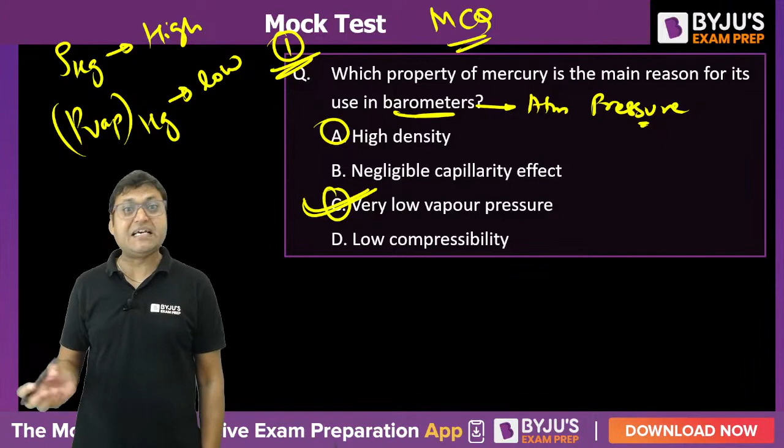The high density is also another reason, but that is the secondary reason. So whenever it is MCQ, you are supposed to select only one answer, one option. And if it is MSQ type of question, then both A and C will be correct. Do you agree? Do you understand it?

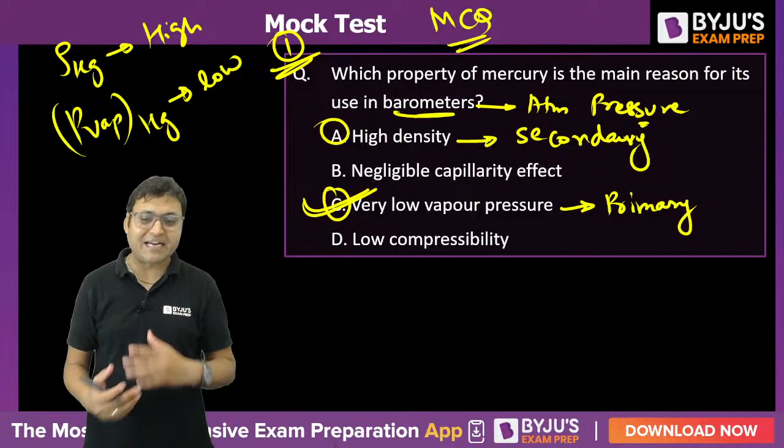Yes, Kiran, well done. Vinay, good, good, good, good. I want every one of you, it is my humble request, the more you share your knowledge, the more you take part in the discussion, the more improvement you will develop in your understanding of the concepts, right? So whether your answer is correct or incorrect, it does not matter at all. But your participation is highly important to start applying, to get the application of the concept in the questions.

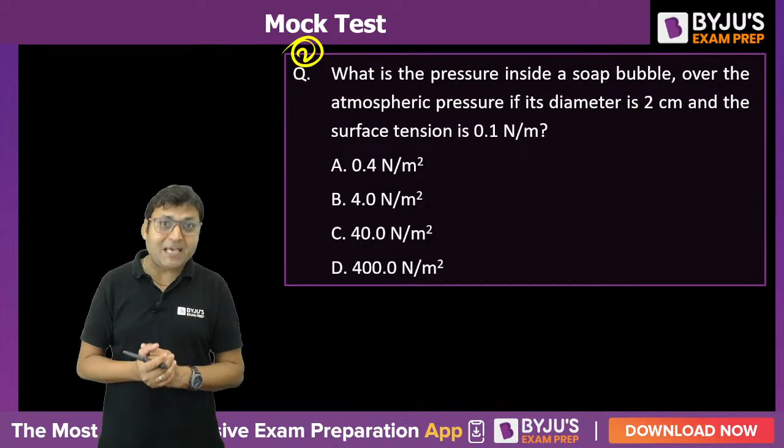All right, so question number 2 is on your screen. What is the pressure inside a soap bubble over the atmospheric pressure if the diameter of the soap bubble is 2 centimeter and the surface tension is 0.1 Newton per meter? This is the unit of surface tension, Newton per meter, or we can also call it Joule per meter square.

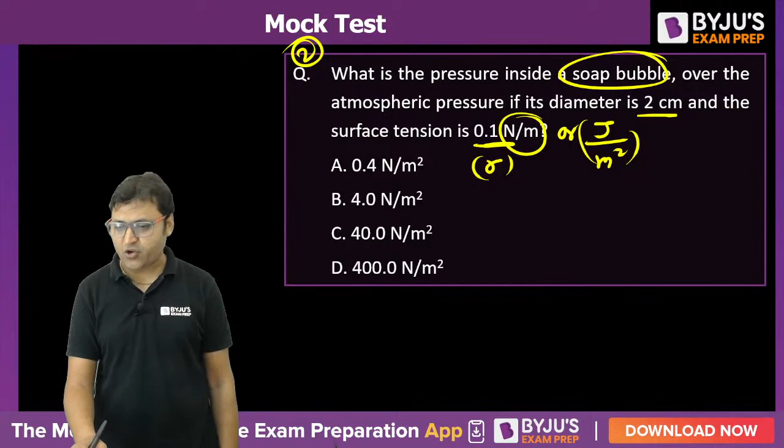Do you know that surface tension can also be defined as the surface energy per unit surface area of the liquid? Yes, because it is a soap bubble, so delta P for a soap bubble is having two interfaces. So 8 sigma by D will be the expression.

If it would have been an air bubble, do not get yourself confused. Air bubble or liquid drop are having only a single interface. Air bubble or liquid interface, delta P will be given by 4 sigma by diameter. So delta P is the pressure difference.

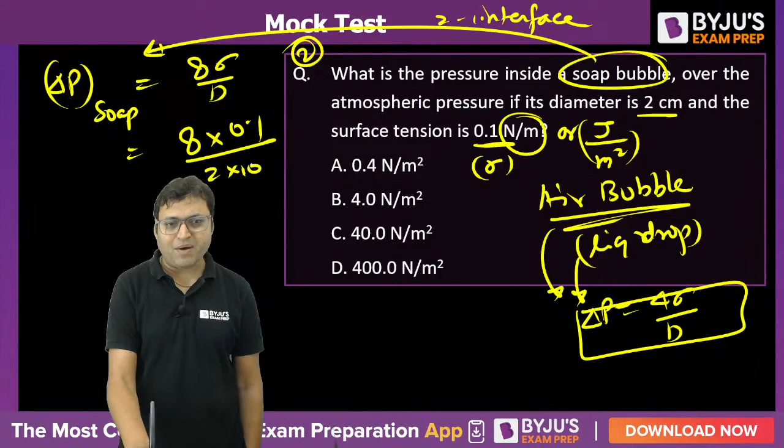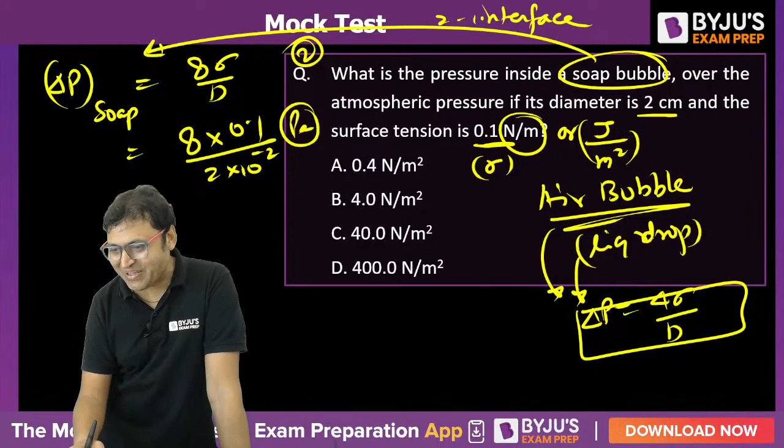If you put the values, 8 into 0.1 upon diameter, that is 2 into 10 to the power minus 2. If the answer is in Pascal, then what is the correct answer? Every one of you. Yes, Kiran, Naruto, well done. What about others? Vinay, good, good. 40 Newton per meter square will be the correct answer for this one.

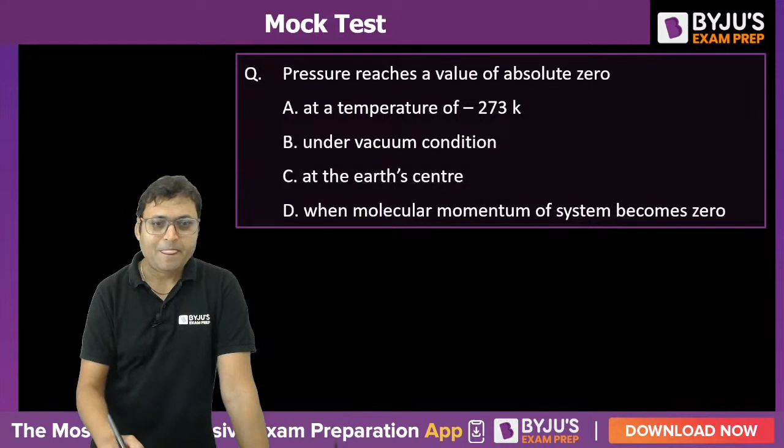Question number 3 on your screen. Quickly get me the answer for question number 3.

Pressure reaches a value of absolute 0. It means absolute pressure becomes 0 Pascal. When does this happen? At a temperature of minus 273 Kelvin? Minus 273 Kelvin never exists. At absolute 0, the absolute temperature is equal to 0 Kelvin. At the absolute 0, the pressure will be 0 Pascal and the absolute temperature will be 0 Kelvin.

Under vacuum condition, what is vacuum condition? Vacuum condition is when the pressure becomes less than atmospheric pressure. When the absolute pressure is less than atmospheric pressure, then it is called vacuum condition. At the earth center, that is not correct.

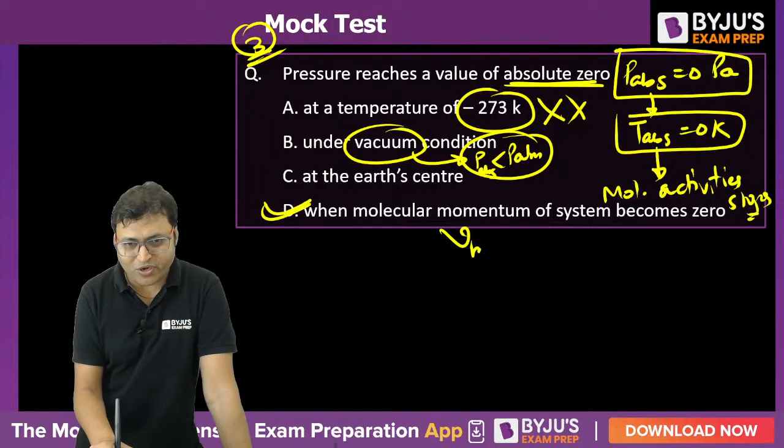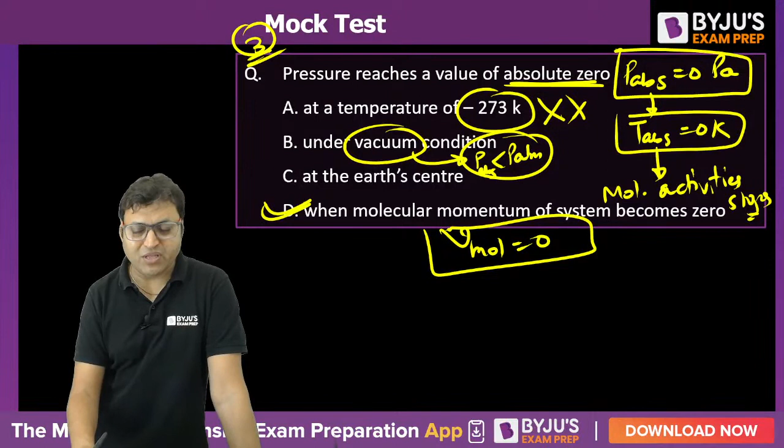At absolute 0, molecular activities stop. So that is why the answer to this question is option D. When molecular momentum of the system becomes 0, or the molecular velocity becomes 0, then only the pressure will be absolute 0, because pressure is the pressure exerted by the molecules. When the molecular momentum is 0, the pressure exerted will be 0.

Question number 4 on your screen. How is the metacentric height GM expressed in case of a floating body? Metacentric height is the parameter defined in case of a floating body or a partially submerged body. It is a memory based question, formula based question.

What is the answer? Yes, well done. So for stable equilibrium, center of buoyancy is lying below the center of gravity and the metacenter. So metacentric height is GM. This is called metacentric height. GM is equal to BM minus BG, isn't it?

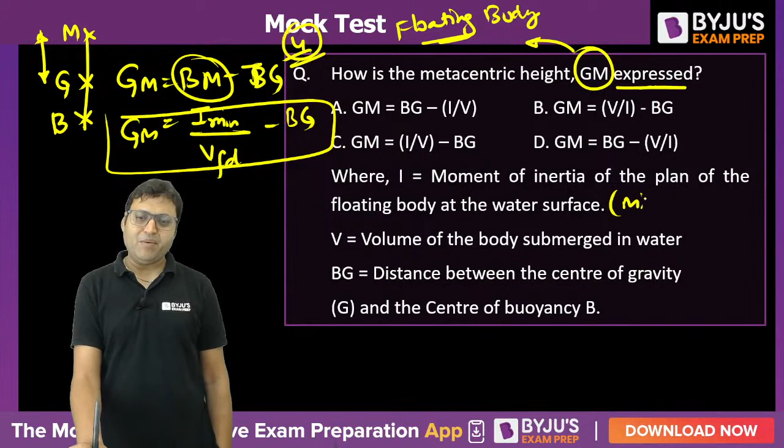And what is BM? BM can be calculated by I, the minimum moment of inertia, upon volume of the displaced fluid, minus BG. That is the expression for metacentric height. I is the minimum moment of inertia of the plane of the floating body, and V is the volume of the body submerged in water or volume of the fluid displaced. BG is the distance between the center of gravity and the center of buoyancy.

What is the correct answer? The correct answer for this question will be option C.

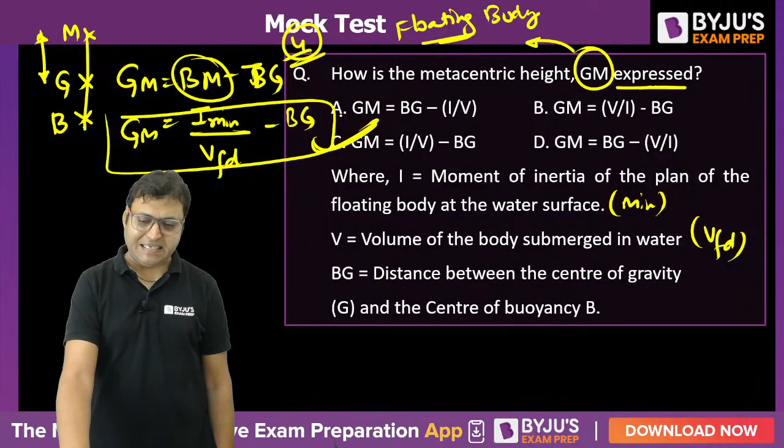Question number 5 on your screen. Try to solve question number 5. It is numerical, a simple numerical. Without using the calculator, you are supposed to get me the answer to this one. Can you do that? Yes, every one of you. Naruto.

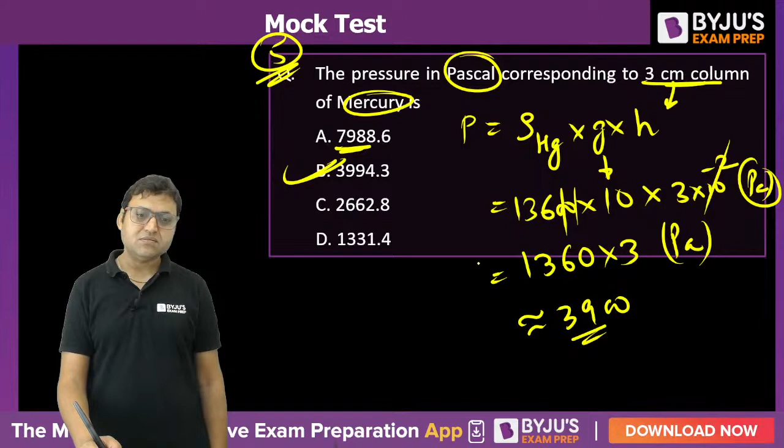Good, good, good. Let us move to the next one.

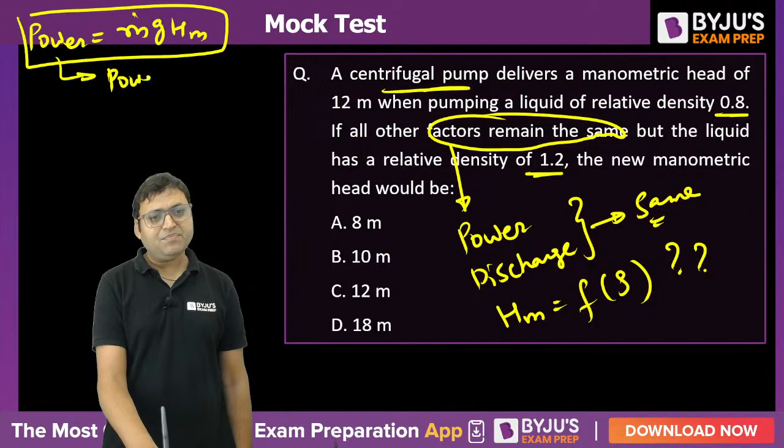We need to find out the manometric head as a function of density or specific gravity. The manometric head and specific gravity are interrelated, right? So can we say the power supplied by the pump is equal to m dot into G into HM, the head raised by the pump, the manometric head? M dot can be written as rho into Q into G into HM. That will be the expression of power.

So because discharge is constant, power is constant, can we say HM is inversely proportional to density? So we can say HM2 by HM1 is equal to rho2 by rho1, or it will be rho1 by rho2.

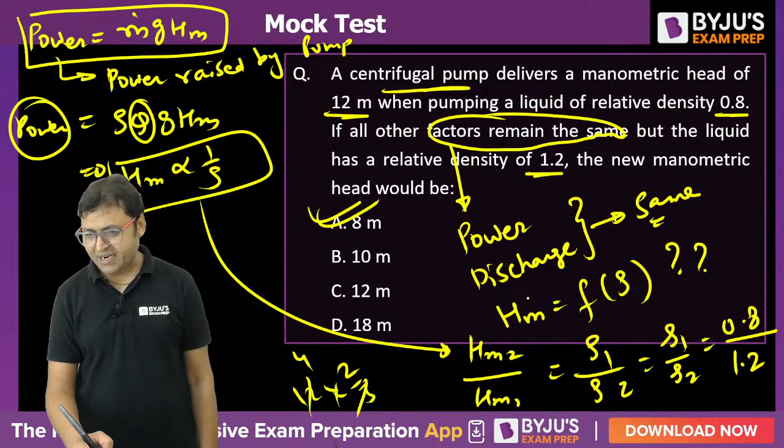What is rho1? We can write it in terms of specific gravity also. So S1 is 0.8, S2 is 1.2, and HM1 is 12 meter. So 12 into 8 by 12, so 12 into 2 by 3, isn't it? What is the answer? 24 by 3. A will be the correct answer, 8 meter. Yes, Kiran, Vinay, Naruto, well done. Correct answer is option A.

The next question on your screen. Try to solve the next one. There is an isosceles triangular plate. What is the meaning of isosceles triangle? Two sides are equal, with base 3 meter and altitude 3 meter. The base and height are 3 meter, immersed vertically in oil of specific gravity 0.8. The base of the plate coincides with the free surface of oil. We need to find out the depth of center of pressure.

The depth of center of pressure from the free surface of the liquid. There are two different parameters: one is the depth of centroid of the surface, another is the depth of center of pressure. What is the depth of center of pressure? The center of pressure is the point at which the hydrostatic force is supposed to be acting on the surface. What is the centroid? Centroid is the point where the gravity force is supposed to act. That is called the centroid of the plane surface.

So can you do the calculation? The base of the plate coincides with the free surface, so the diagram will be something like this. If you know the shortcut, if we want to find out the depth of centroid from the free surface, we call it x bar. So if the question had been about x bar, your answer would have been 1 by 3 into h, into 3.

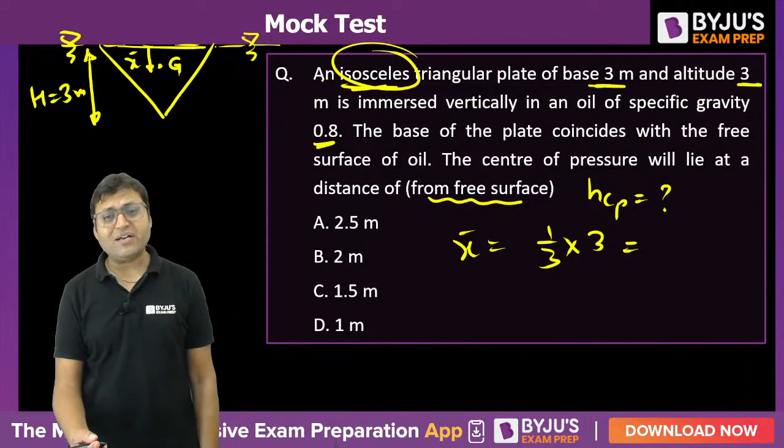Whether it is isosceles or not, it never matters. So 1 by 3 into 3, 1 meter is the depth of this.

What happened? One by 3, sorry. X bar by 2. What is the answer? How is it happening? What happened? X bar is equal to, what is the depth of CP?

X bar is 1/3 of h, sorry. So HCP will be equal to 1/3 of h. Put 1 and 1 in the numerator and denominator. So it is 2 by 3 h. Sorry, my mistake, this is the trick.

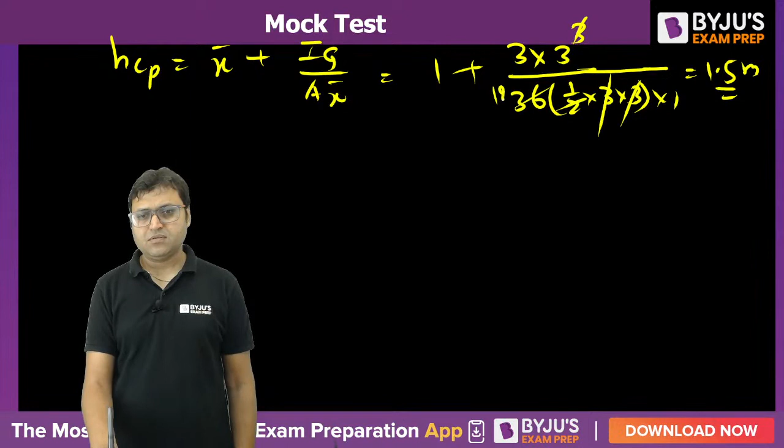3 getting cancelled out with this 3. So 1 plus 9 by 18, so that is 1 plus 1 by 2. 3 by 2, that is 1.5 meter. That is another way of getting the answer.

The next question on your screen. In a 1 in 50 model of a spillway, 1 in 50 means that is the geometrical scale ratio of a spillway. Discharge is 3 meter cube per second. Find the corresponding discharge in the prototype.

QM is given. We need to find out QP. What is the discharge in the prototype? Can you solve it? Can you get me the answer? If it is a spillway, do you know what is a spillway?

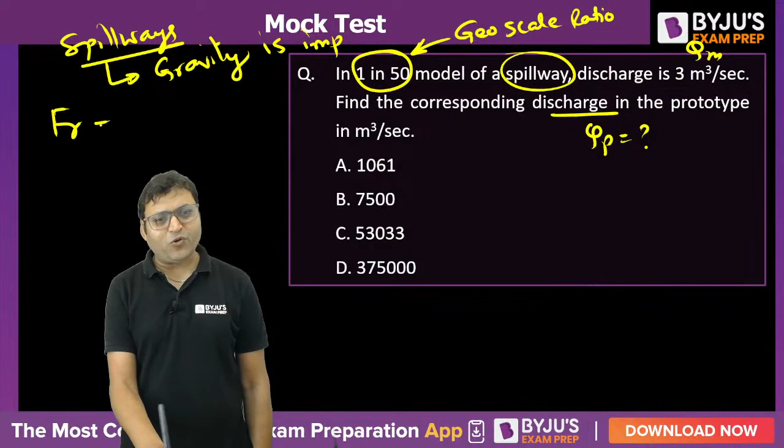The gravity becomes important. In case of a spillway, gravity will be important. So if the gravity is important, then the Froude model law will be applied. Froude number will be constant, that is equal to V upon under root of L into G. So from here we can say V is directly proportional to root L, and Q is proportional to D square into V. So Q is proportional to L square into root L, which is L to the power 2 plus 1 by 2, that is 5 by 2.

So QP by QM is equal to LP by LM to the power 5 by 2. So QP, do not use the calculator. Who is using the calculator? Anyone using the calculator? Prototype dimension will be 50 unit and the model dimension will be 1 unit. So it will be 3 into 50 by 1 to the power 5 by 2.

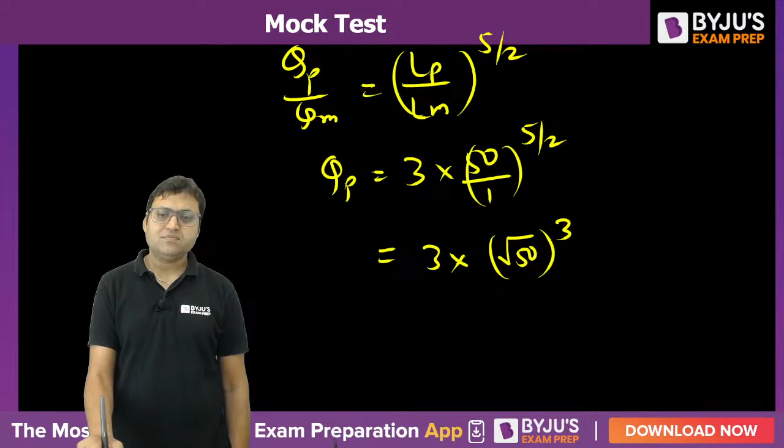Right? So can we write it as 3 into, what is root of 50? Can you find out the value of root of 50? That is close to 7. 7 7s are 49, so it is close to 3 into 7 to the power 5.

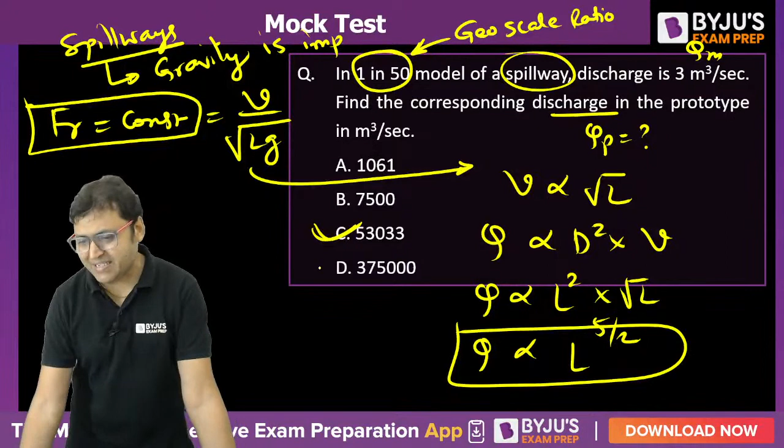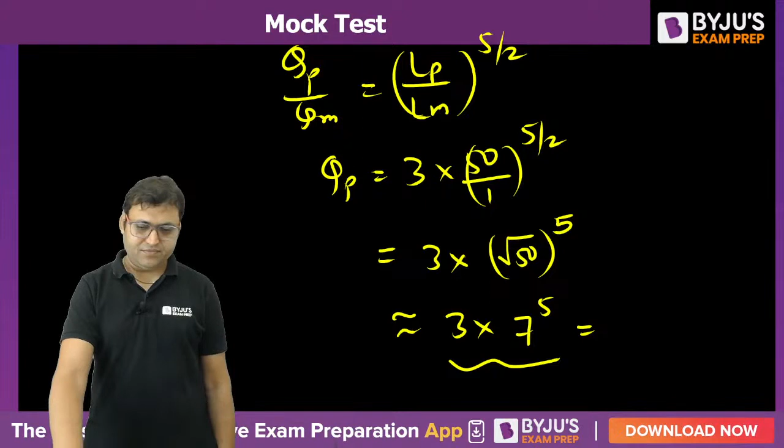If you do the calculation, your answer will be nearest to the option C. Your answer will be nearest to option C, isn't it? That is how you can do the calculation without using the calculator. It is close to 7 to the power 5 multiplied by 3, and 7 to the power 5 you can easily solve without using the calculator.

The next one. Which one of the following statements is correct?

Dynamic viscosity is the property of the fluid which is not in motion. Is the statement correct or not? Why do we call it dynamic viscosity? Because it gives us information about the dynamic parameter, which is shear stress or shear force required to make the fluid flow. That is defined as dynamic viscosity. We also call it absolute viscosity because mu is not a function of density.

What is the correct answer for this one? Cavitation results from the action of very high pressure, or cavitation results from the action of very low pressure? So C is incorrect. When the pressure of the liquid becomes less than the vapor pressure, then cavitation bubbles form. So C is not correct.

Real fluids have lower viscosity than ideal fluids. Ideal fluids have zero viscosity. Real fluids have non-zero viscosity. So ideal fluids have lower viscosity than real fluids. So D is also incorrect.

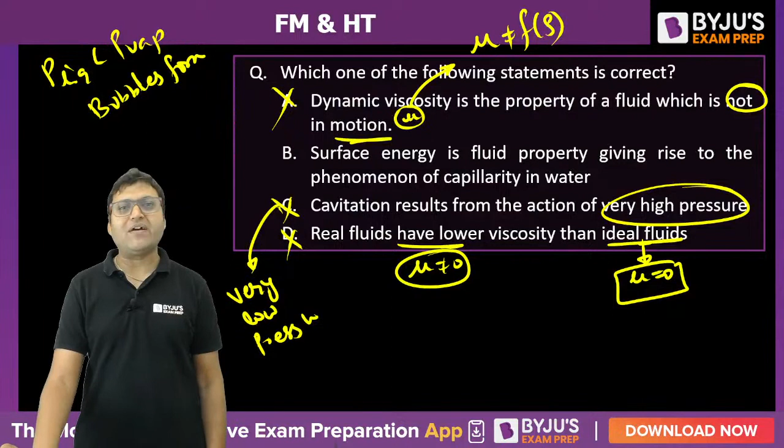What about A and B? Dynamic viscosity is the property of the fluid which is not in motion - that is incorrect, because dynamic viscosity is the property of the fluid whether it is in motion or not. It does not matter whether the fluid is in motion or not. Surface energy is the fluid property - surface energy is nothing but surface tension. Surface energy is the property of the fluid giving rise to the phenomena of capillarity in water. Yes, capillarity is because of surface tension. So B is the more appropriate answer.

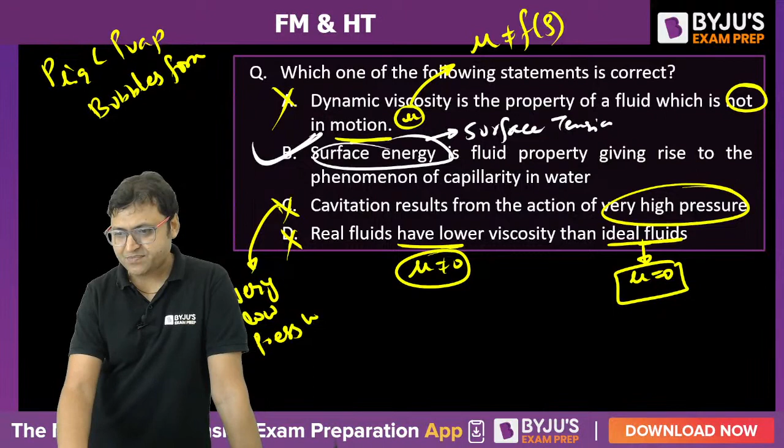The next one: Let C1 be the velocity of a pressure wave traveling along a rigid pipe containing water with its bulk modulus as given. Let C2 be the velocity traveling along a similar rigid pipe carrying oil of relative density 0.6 with its bulk modulus given. Through a similar pipe, what will be the ratio of C1 by C2? C is the velocity of the pressure wave, or velocity of sound in fluid. What is the formula for C?

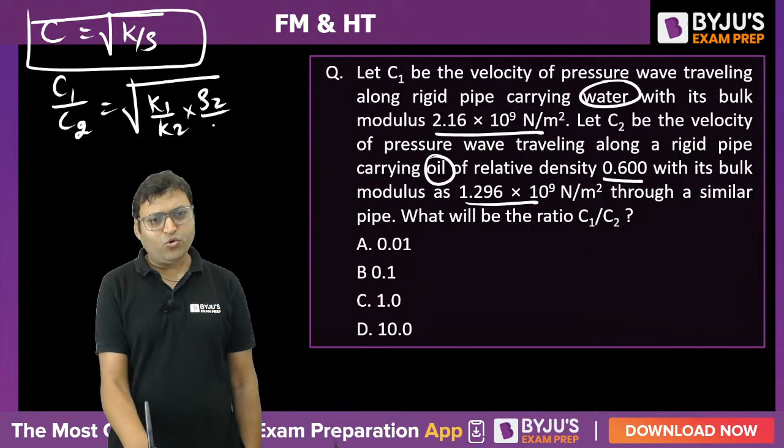C is calculated by under root of K by rho. So C1 by C2 is equal to under root of K1 by K2 into rho 2 by rho 1. Put the value and you will get the answer. K1 is 2.16 into 10 to the power 9, and K2 is 1.296 into 10 to the power 9, into rho 2, that is 0.6 upon 1.

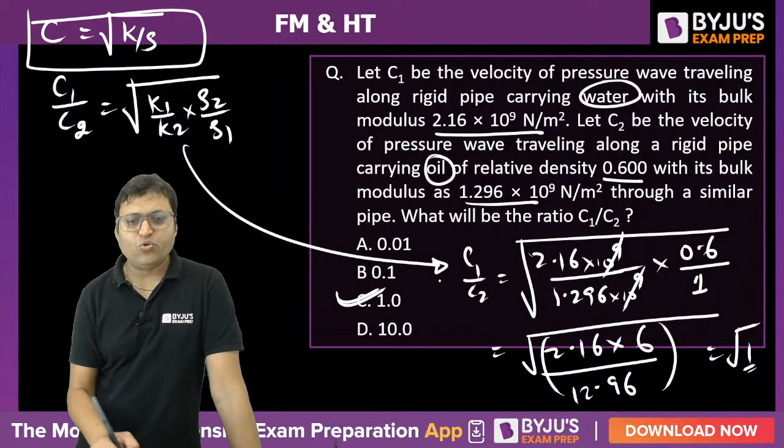So if you simplify this, 2.16, or we can say under root of 2.16 into 6 upon 12.96. So 2.16 into 6 is nothing but 12.96. So that will be root of 1. Root of 1 is 1.

Option C will be the correct answer. Option C. The next question on your screen.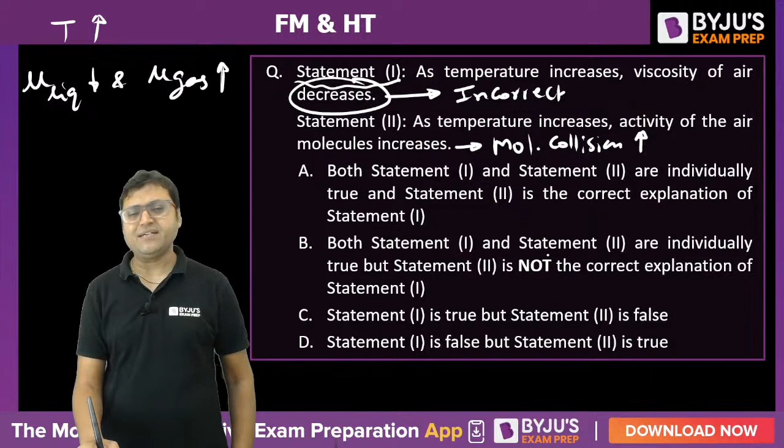Statement 1 itself is incorrect. As the temperature of air increases, activity of the air molecules increases - yes, increase in molecular collision. Molecular collision increases, or molecular momentum transfer increases, which increases the viscosity of the gas at higher temperature. So statement 2 is correct, but statement 1 is incorrect. So option D will be the correct answer.

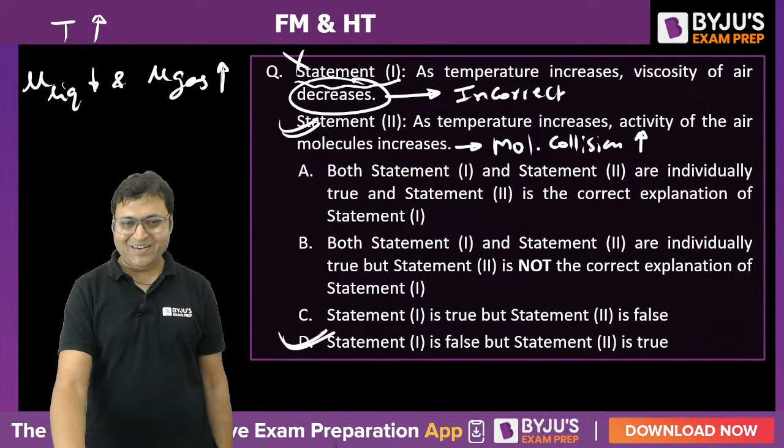The next question. Solve the next one. Find the answer to the next one.

A pressure gauge reads 57.4 kilopascal and 80 kilopascal respectively at a height of 8 meter and 5 meter fitted on the side of a tank filled with a liquid. We need to find out the density of the liquid. The pressure at the top is 80, wait, pressure is less at the top and more at the bottom. This is 57.4, this is 80, and the distance is 8 meter and 5 meter, so the difference is h. Can we write rho of the fluid into g into h is equal to 80 minus 57.4 kilopascal?

We can write the pressure equation. Let me call it A, let me call it B.

If we write the pressure equation, pressure at A plus rho fluid into G into H is equal to pressure at B. Pressure at B is 80 kilopascal, pressure at A is 57.4 kilopascal. So we can find the density of the fluid: 80 minus 57.4 equals 22.6 into 10 to the power 3 upon 9.81 into 3. 9.81 is almost 10, let us write it as 10 only. So the answer will be 2260 by 3, that will be the density.

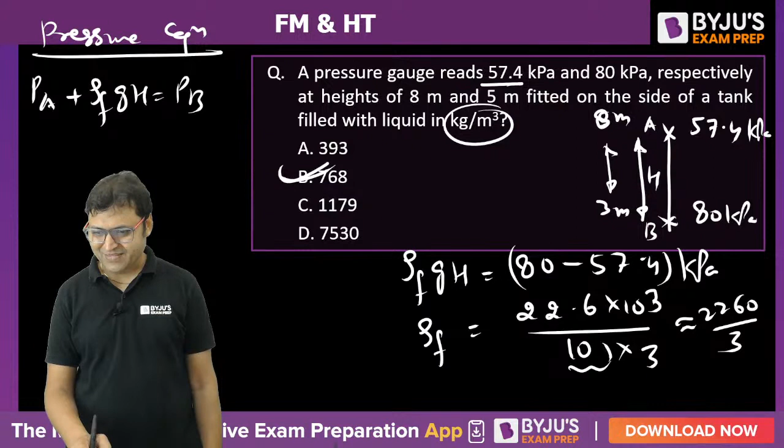It is close to 1120... sorry, 768. Yes, 2260 by 3, it is close to 768. Good, good, good, B is the answer.

The next one, find the answer to the next question. Question number 13. There are 25 questions in total, we are halfway. A mercury water manometer has a gauge difference of 0.8 meter.

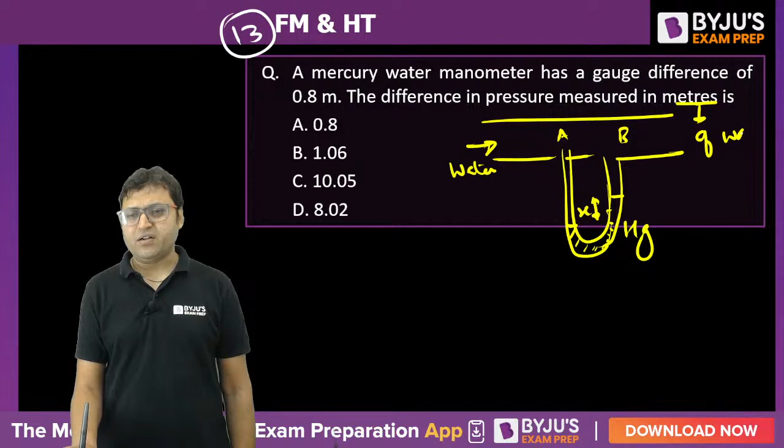This is mercury, and there is water flowing. There is water, and the manometric fluid deflection is X. So we need to find out the pressure difference in meter of water. If we want to find the pressure difference in meter of water, delta P by rho G equals manometric fluid deflection SM by SF minus 1.

So it will be 0.8 meter is the difference, 13.6 by 1 minus 1, so 12.6 into 0.8 meter of water will be the answer. 12.6 into 0.8, so it will almost be 10.05. C will be the answer.

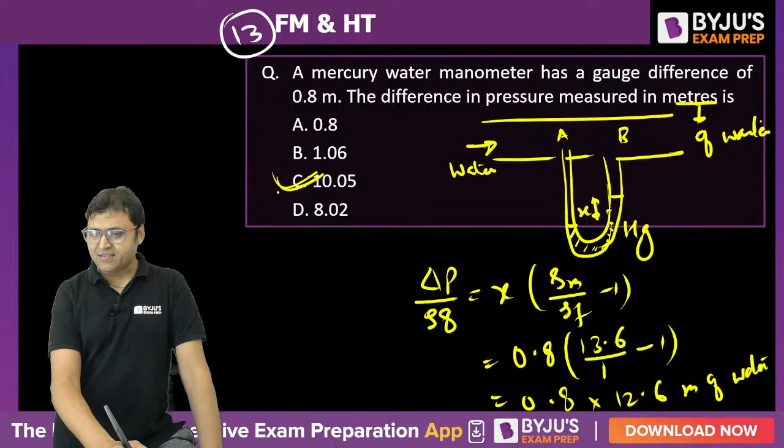Yes, yes, Kiran, Naruto, well done. 10.05 will be the correct answer.

The next one, can you see the figure? Are you able to see the figure? Consider the figure below relating to buoyancy in water. There is a body completely submerged, ABCDEF. What will be the downward force upon the top of the body? Let me know the answer.

The downward force exerted on the body is equal to the weight of the fluid which can be contained by the vertical hydrostatic force, which is the weight of the fluid that can be contained by the curve up to the free surface. Extend A and C up to the free surface. This volume will decide the downward force, FV1, and the upward force will be decided by this other volume. The upward force is calculated by that volume, and the net upward force is the subtraction.

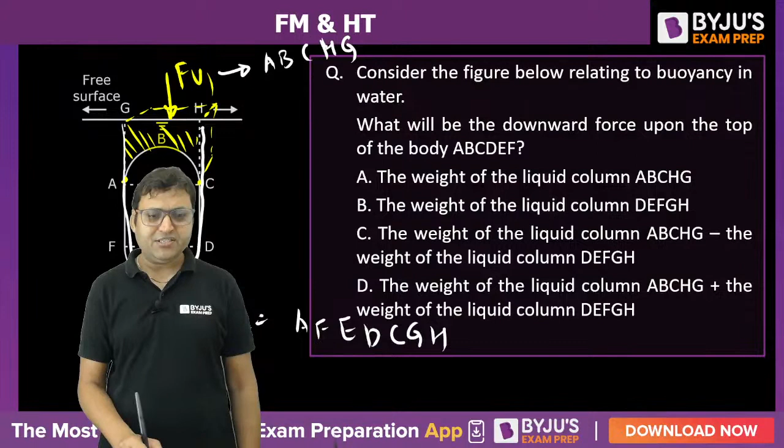So downward force will be equal to the weight of ABCGH or HG. And FV2, if we find FV2, it will be the weight of AFEDCGH, that is FV2. The difference of these two will be the buoyant force. So what will be the downward force upon the body? Option A will be the right answer.

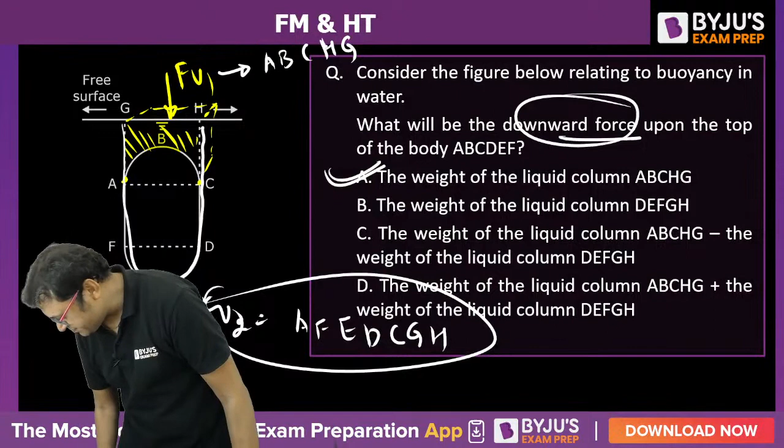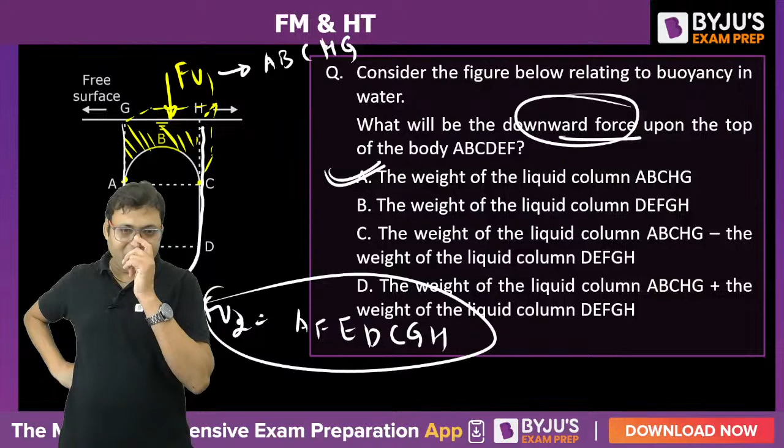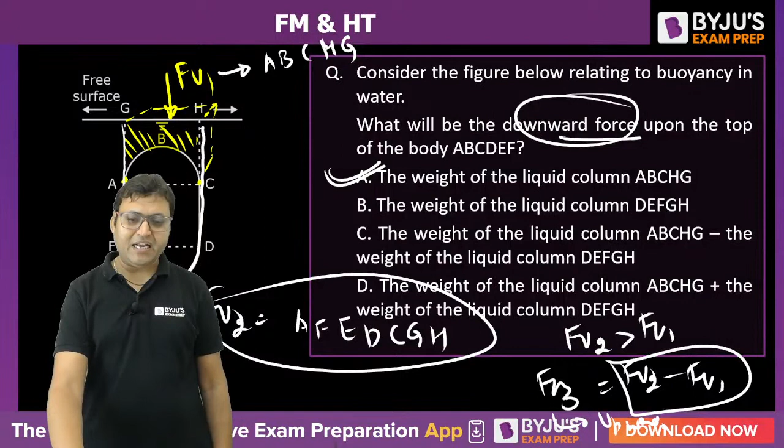The question is to find the downward force. If we want to find the downward force on a surface, extend the edges normally up to the free surface, so it's the weight of the fluid which can be contained by the curve up to the free surface. FV1 will be the weight of ABCHG, FV2 will be the weight of AFEDCGH, and the difference of these two will be the buoyant force. So option A is correct, but it is not the net force. The net force acts in the upward direction, not downward. FV2 will be greater than FV1, so the buoyant force equals FV2 minus FV1, which is upward. The net vertical force acts in the upward direction.

The next question on your screen. A ship has a metacentric height of 0.9 meter. That is GM. Its period of rolling is 20 seconds, that is the time period of oscillation. The relevant radius of gyration will nearly be?

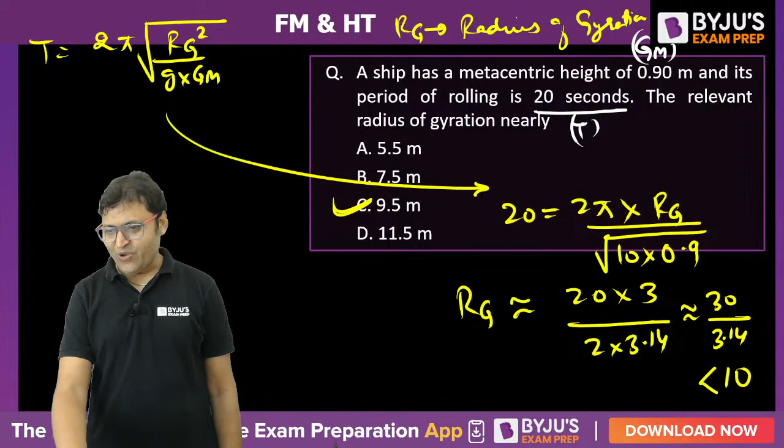Kiran, are you using the calculator? How are you getting such accurate values? Do not use the calculator. ISRO will not allow you to use a calculator, so try to do the calculation correctly without using one.

The next question: there is a two-dimensional water jet which strikes a fixed two-dimensional plate at 30 degrees to the normal to the plate.

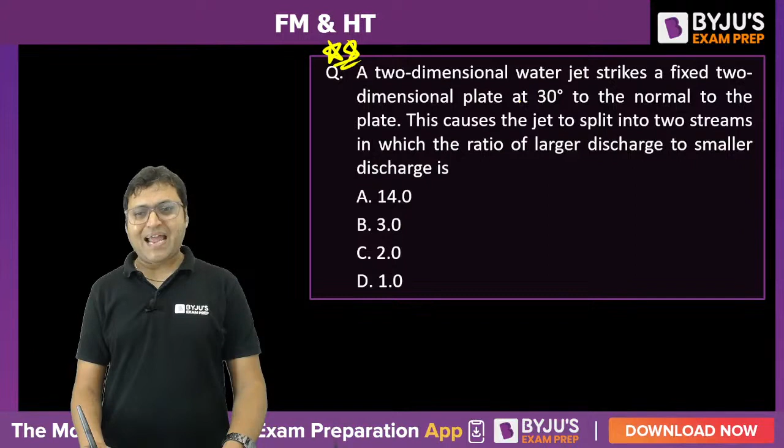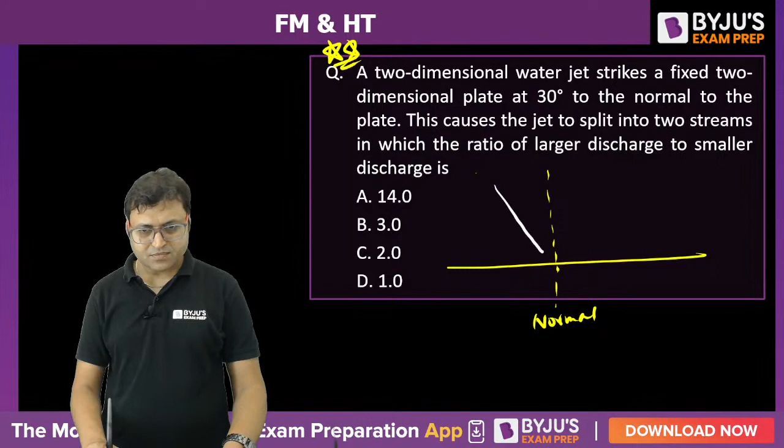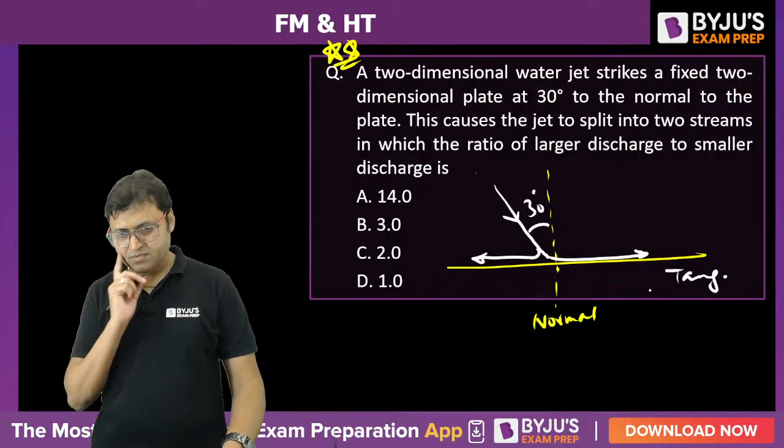A two-dimensional water jet strikes a fixed two-dimensional plate at 30 degrees to the normal to the plate. This is beautiful question. What is the answer to this one? This is normal to the plate, and this is how the water is striking, isn't it? This is 30 degrees. Some fluid will go this way, some fluid will go that way. This is the tangential direction.

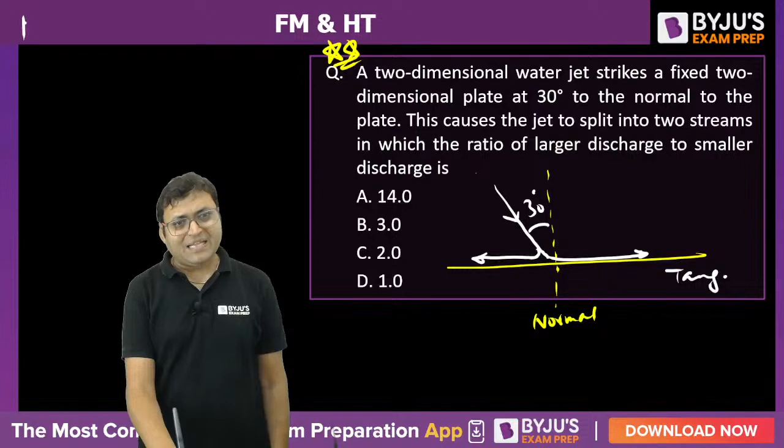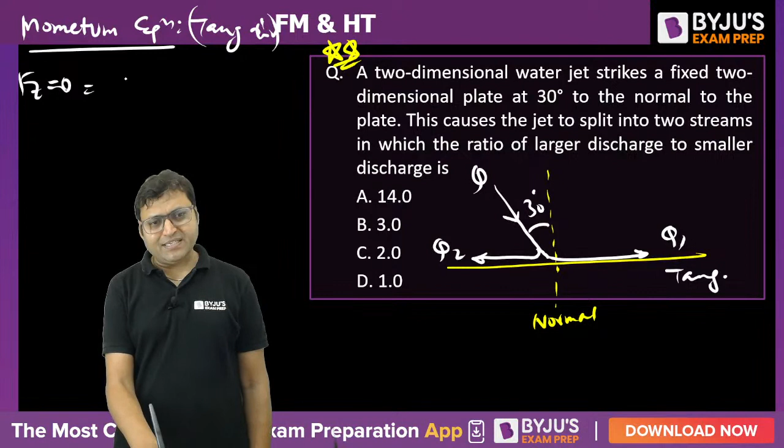So if we write the momentum equation in the tangential direction, Ft will be equal to 0. That is equal to, this is Q, this is Q1, this is, let us say, Q2. So that is equal to rho Q V sin 30, that is the initial momentum, minus rho (Q1 minus Q2) into V. So from here we can say Q1 minus Q2 is equal to Q sin theta. Are you able to understand it or not?

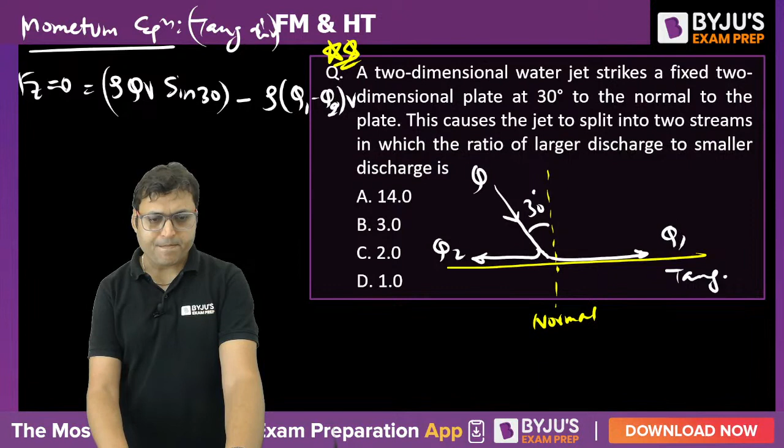Do you guys understand it? Whenever we are supposed to develop the relation between Q1 and Q2, the question is to find out Q1 by Q2. So can we say Q1 minus Q2 is equal to Q sin theta, and Q1 plus Q2 is equal to Q? That we all know. This is 1, this is 2. So if we add these together, then what will be Q1? So 2Q1 is equal to Q(1 plus sin theta), isn't it? So Q1 is equal to Q by 2 times (1 plus sin theta).

And what about Q2? Q2 is equal to Q minus Q1, that is equal to Q minus Q by 2 (1 plus sin theta). So it will become Q by 2 minus Q by 2 sin theta, that is Q by 2 (1 minus sin theta).

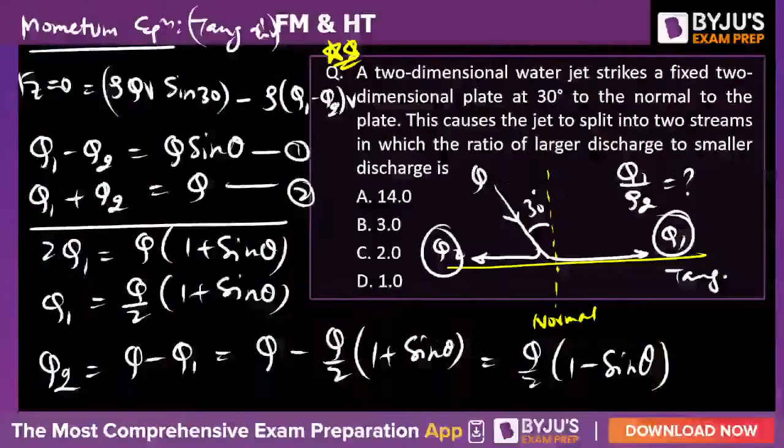So Q1 by Q2 is equal to (1 plus sin theta) upon (1 minus sin theta), isn't it? So Q1 by Q2, with theta equal to 30 degrees, is (1 plus sin 30) upon (1 minus sin 30). That will be the answer. Sin 30 is 1 by 2. So it becomes (1 plus 1 by 2) upon (1 minus 1 by 2), that is 3 by 2 upon 1 by 2.

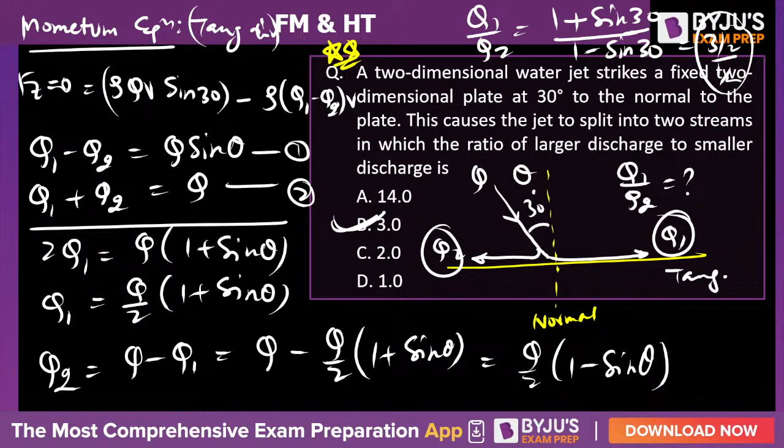So the answer will be B. B will be the correct answer for this one, it will not be A. Do not memorize the formula without knowing the concept — that is the learning through this question.

So let us move to the next ones. Now there are some questions from heat transfer. We have discussed around 16 questions from fluid mechanics. The next question is from heat transfer.

A small sphere of outer area — there is a sphere, let me call it 1, so A1 outer area 0.6 meters square — is totally enclosed by a large cubical hall. This is surface 2. The shape factor of the hall with respect to the sphere is F2 to 1, equal to 0.004. What is the measure of the internal side of the cubical hall? Let me call it L, the side of the cubical hall. Then we can say F2 to 1 is A1 F1 to 2 upon A2, from the reciprocity theorem.

What is the answer? Can you find out the answer to this one? F1 to 1 is equal to 0 because it is a convex surface; for a convex surface, the self shape factor is 0. So F1 to 2 is equal to 1 from the enclosure theorem. So 0.004 is equal to A1 by A2, and A1 is 0.6, A2 is 6L square. So we can easily find that 0.6 by 6 is 1 by 10. So 10 L square is equal to 0.004.

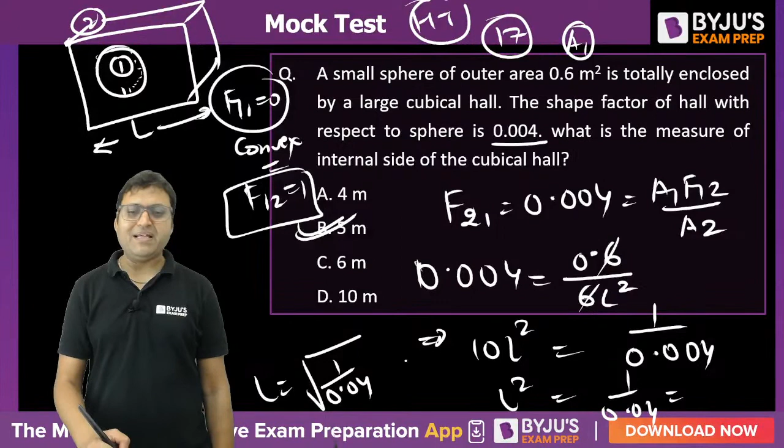Sorry, 10L square is equal to 1 upon 0.004. So L square is equal to 1 upon 0.04. What is L? Can you find out the value? Under root of 1 upon 0.04, so 100 by 4, under root of 25. B will be the answer, 5 meter will be the correct answer for this one.

The next question, memory based question. Which one of the following expresses the thermal diffusivity of the substance in terms of thermal conductivity, mass density and specific heat? What is the answer? What is thermal diffusivity? Heat transferability.

And the unit is meter square per second. It is similar to Prandtl number. Sorry, what is the unit of thermal diffusivity? It is similar to kinematic viscosity, momentum diffusivity. So K by rho C will be the unit. What is the answer? K by rho C. The ratio of thermal conductivity to the heat storage ability, that is called thermal diffusivity, K by rho C.

The next one, from conduction. Next is the question from the conduction. There is a furnace made of red brick wall of thickness 0.5 meter and thermal conductivity 0.7, for the same heat loss and the same temperature drop. Q and delta T are same. This can be replaced by a layer of diatomite earth of conductivity K2 and thickness L2. Question is to find out L2.

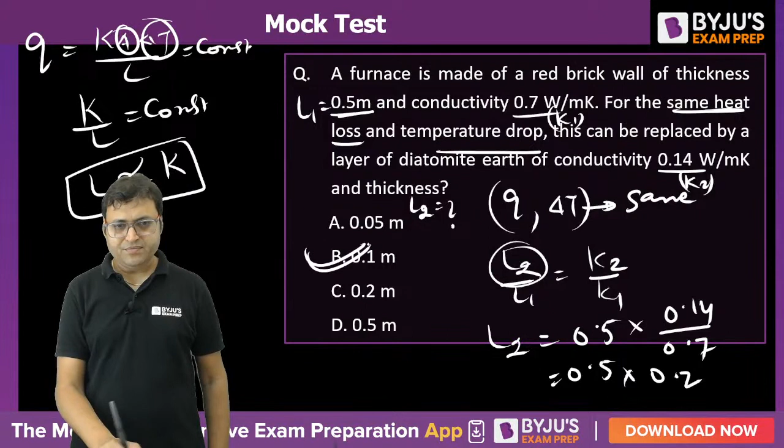We need to find out L2. L1 is 0.5 into K2 by K1, 0.14 upon 0.7. Can you solve it? 0.5 by, 0.5 into 0.2, that is 0.1. B is the answer. Yes, Naruto, Vinay, Kiran, well done.

Good, the next one. From the critical thickness of insulation, there is an electrical cable, cable means a cylinder of aluminium conductor. Thermal conductivity of aluminum is given, is to be insulated with rubber. The cable is to be located in air. What will be the critical radius of insulation?

Critical radius of insulation for a cylinder is the ratio of thermal conductivity of insulated material divided by the convective heat transfer coefficient of the medium in contact with the insulating material. So here this is not important, 240 watt per meter Kelvin is not important. The important parameter is 0.15 because insulating material is rubber, divide by 6. Can you solve it?

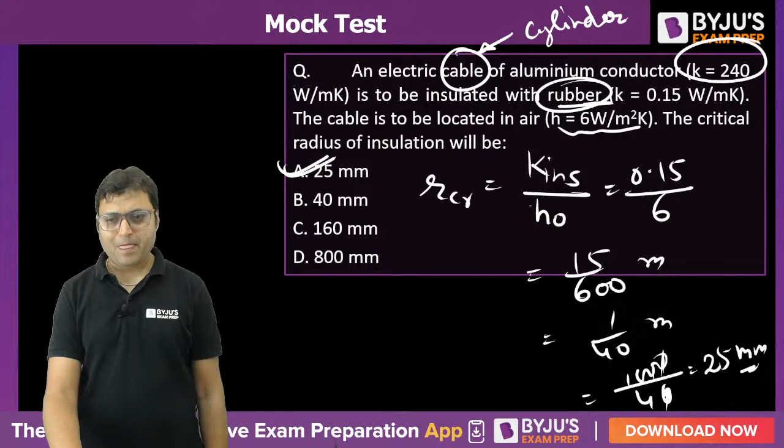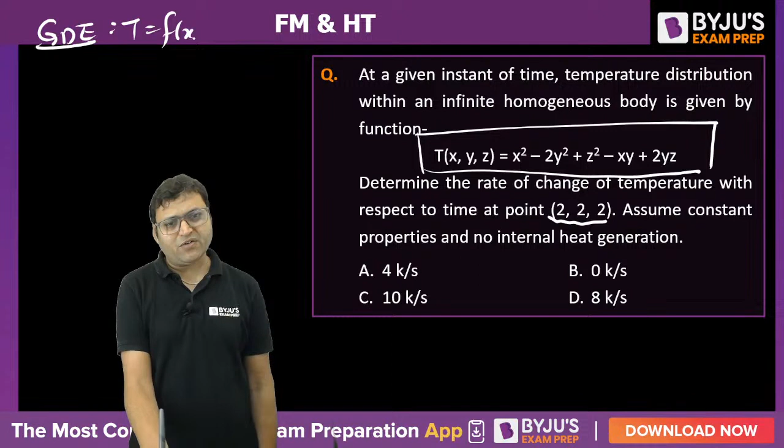The next one. At a given instant of time, temperature distribution within an infinite homogeneous body is given by this function. Determine the rate of change of temperature with respect to time at this point. Assume constant properties and no internal heat generation. So we will use the expression governing differential equation where the temperature is a function of x, y, z and t. So what we can say, because temperature is not a function of time...

As the temperature is not a function of time, let us write the governing differential equation: d square T by dx square plus d square T by dy square plus del square T by del z square plus q dot by k is equal to 1 upon alpha, del T by del tau. We need to find out this. Q dot by k is 0.

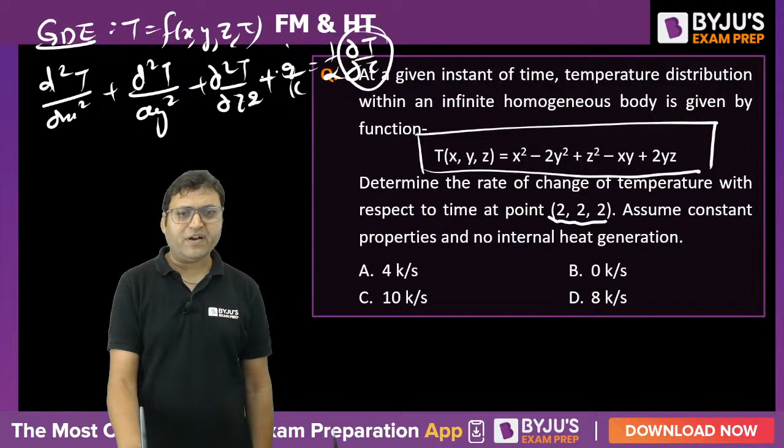So that can be written as del by del x. The first term will be: del T by del tau is equal to alpha, then del by del x, del T by del x, plus del by del y, del T by del y, plus del by del z, del T by del z.

So alpha multiplied into del t by del x. Del t by del x will be equal to del by del x of 2x minus y, plus del by del y. What is del t by del y? Minus 4y, minus x, plus 2z, plus del by del z of 2z, plus 2y.

Then differentiate again. Del by del x of 2x is 2, then minus 4, plus 2. So 0 will be the answer. The answer will be 0.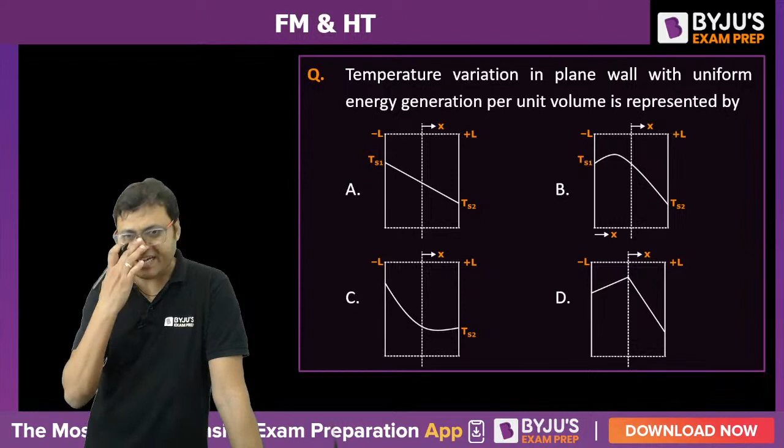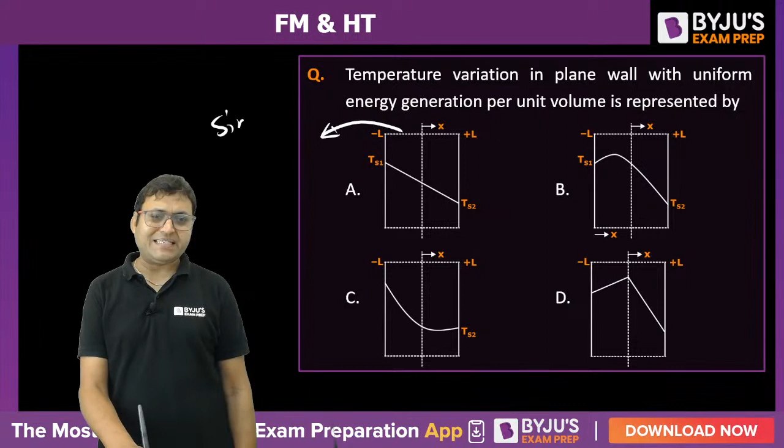So what is the correct answer? This is the temperature profile for a single wall, with heat generation equal to 0 and steady state. And this will be the curve for the composite wall.

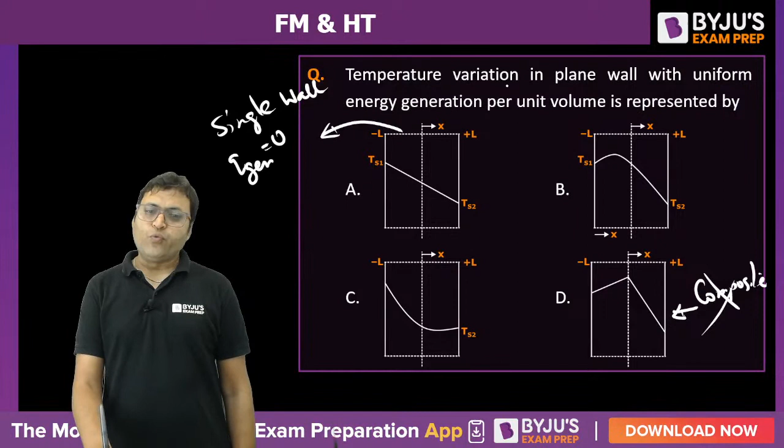This is not for the composite wall actually. So whenever there is heat generation, the temperature is a function of x square, that is a parabola. That will be a parabola. B is the answer. This will be the curve when the thermal conductivity is variable, 1 minus beta T.

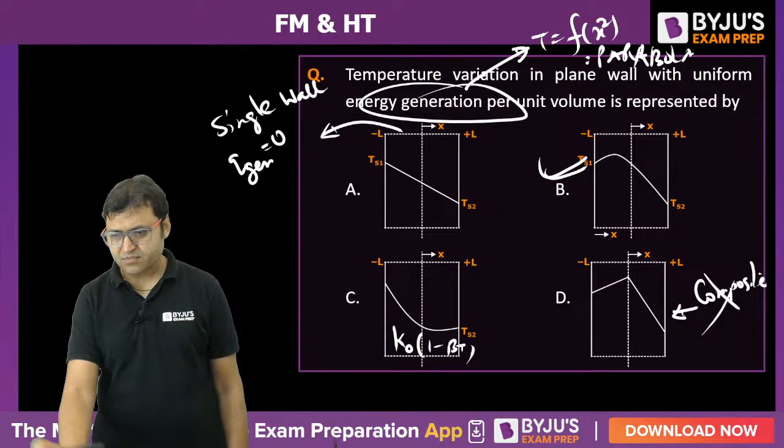The next question. Fin effectiveness is enhanced by.

What is fin effectiveness? That is Km by H, or we can write it as K by H. M is the fin coefficient, under root of HP by Ka, or we can say fin effectiveness is given by under root of Kp upon HAC.

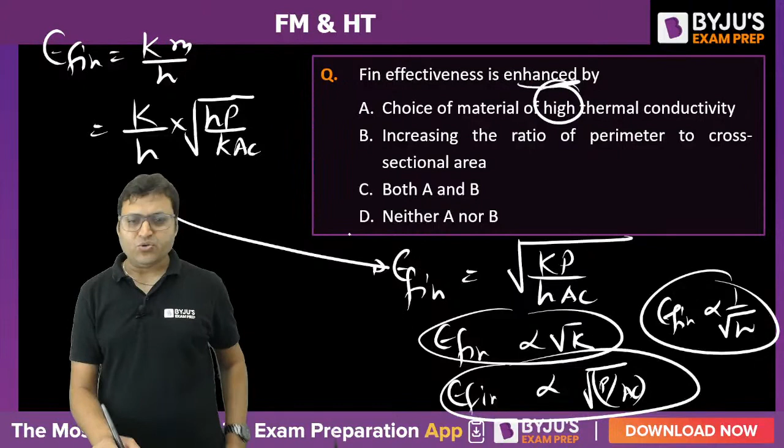So the choice of material with higher thermal conductivity is correct, since effectiveness of the fin is directly proportional to root K. Effectiveness of the fin is proportional to under root of P by A, and inversely proportional to root H. These are the three relationships, so increasing the ratio of perimeter to cross sectional area is also correct. So A and B both are correct, meaning the correct answer is option C.

Yes, Sagar, we will plan.

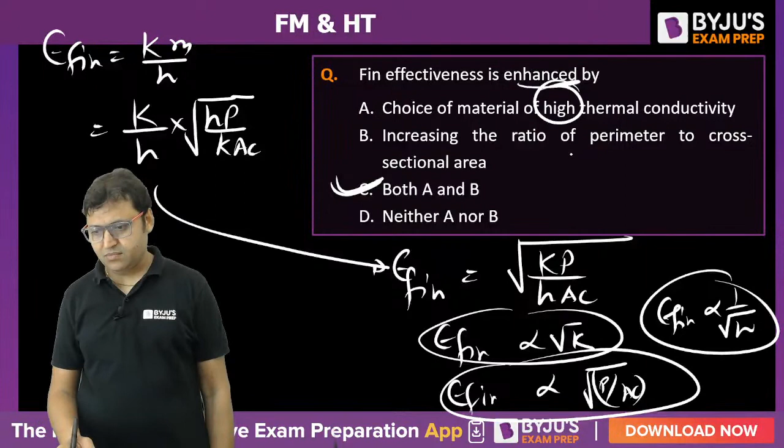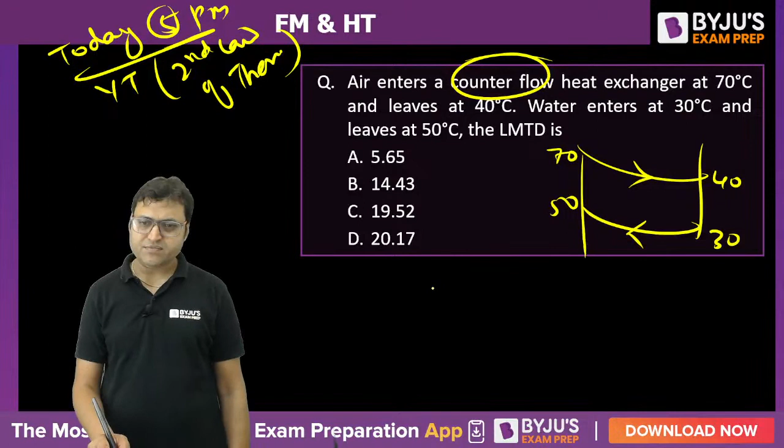So LMTD is equal to delta Ti, 70 minus 50 that is 20, minus delta T naught, 40 minus 30 that is 10, upon natural log of 20 by 10. So it is 10 upon ln of 2. What is natural log of 2?

If you do not know the value, you will not be able to solve it. So 10 upon 0.693 will be the value of delta Tm.

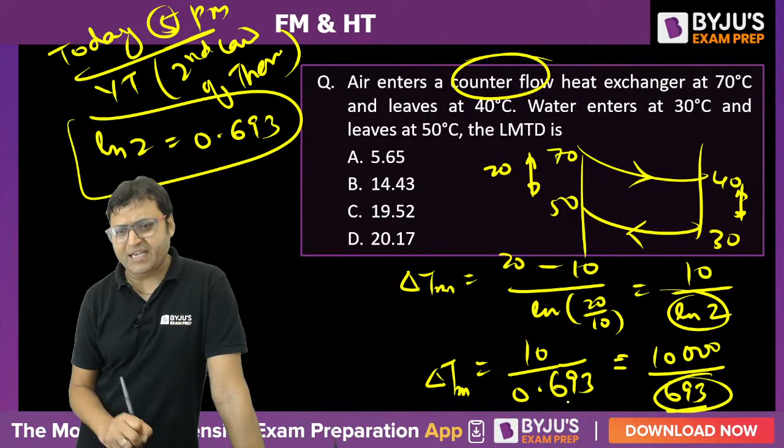10 divided by 0.693, can you do the calculation? 10,000 divided by 693. We can call 693 almost 700. So 10,000 upon 700, we can say it is almost 100 by 7, which is 14.43 something.

Yes, aspirant Sagar, well done. B is the right answer for this one.